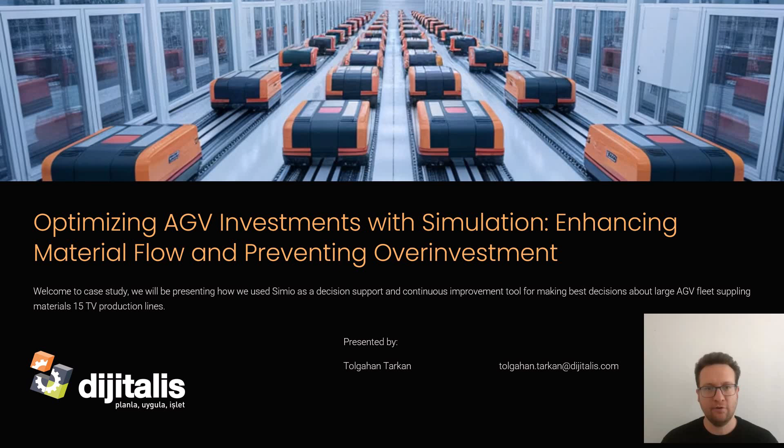In this session, I will start with an introduction to our company, Dijitalis, and myself. Next, I will be presenting the details about our project, such as the initial design, improvements, experiments, the results analysis, and so on.

Dijitalis Consulting was established in 2006 in Istanbul by Tolga Yanaşık. Since then, we have successfully delivered over 250 projects for more than 400 clients across 15 countries. Our clients represent a wide range of industries, with the majority coming from the automotive, manufacturing, logistics, and textile sectors.

Most of our clients approach us when they are redesigning their facilities or undertaking major investment and improvement projects. For these facility layout projects, we build mathematical models to analyze material flow and identify inefficiencies. We then test various layout improvements and design alternatives.

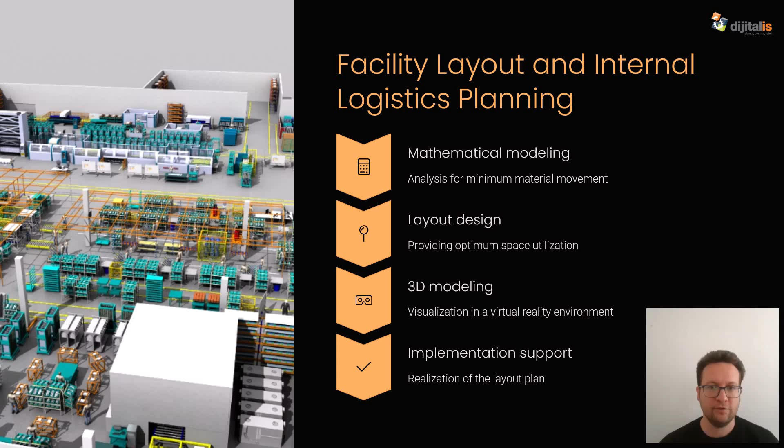Our proposed facility layouts are not only delivered through AutoCAD drawings and Excel-based calculations, but they are supported by discrete event simulation models that offer realistic performance insights along with 3D and virtual reality visualizations. Additionally, we provide ongoing support during the implementation phase to ensure a smooth transition to the new facility design.

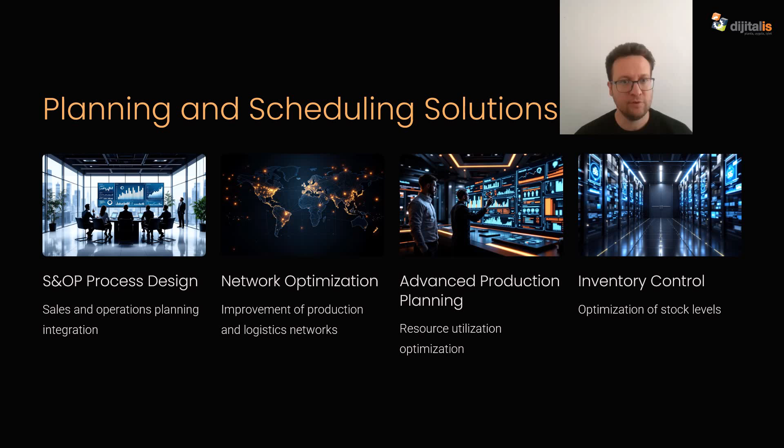Our services go beyond facility design and internal logistics. We also analyze and optimize large-scale, complex supply chain systems, integrating them with sales and operations planning processes. We deliver advanced production scheduling and planning solutions to enhance production capacity and improve customer service levels. In addition, we optimize inventory control strategies using simulation models, helping our clients avoid stockouts while minimizing their inventory levels.

So, about me, as I said, I'm Tolgahan Tarkan, a senior consultant in Dijitalis. I'm a simulation expert, a business analyst, and data analyst. I have completed my bachelor's degree in Yeditepe University in Turkey and my master's degree in Jönköping University in Sweden. I have more than 12 years of experience in simulation modeling in a wide range of industries, including production systems, supply chains, energy systems, restaurant operations, and much more.

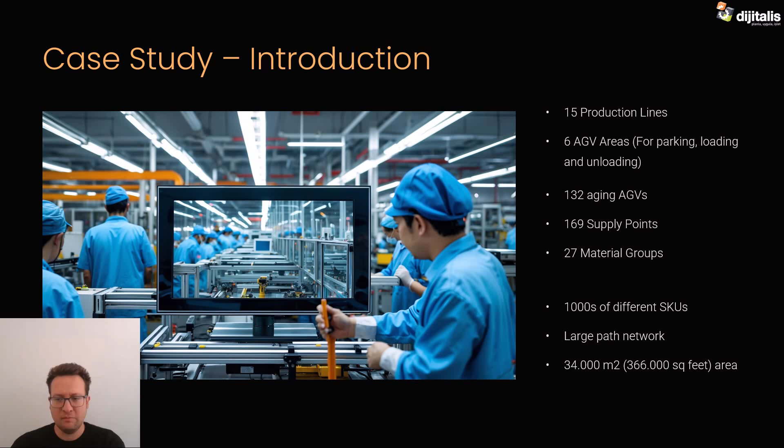So, about our case study. Our case study is about a TV manufacturing company which currently has 15 assembly lines and an aging AGV fleet of 132 vehicles, supplying from 6 AGV parking locations to 169 points on assembly lines. There are thousands of different SKUs and 27 material groups transported to the assembly lines. The production facility is quite large. We are talking about an area of 34,000 square meters, covering the assembly lines and the AGVs.

The TV manufacturing company is initiating big investment projects. They are renewing their production facility with huge investments on automated warehouses, a new paint shop, increased production capacity on assembly lines, and of course, a new AGV fleet. Even though it is not a real greenfield project, they call it greenfield due to the size of the investment. Our main focus is, of course, on the AGV fleet.

The current AGV fleet is outdated. They often get stuck in the path network and cannot supply material on time, causing delays in the production schedule. Our client wants to know how many AGVs they need to order without overspending and without causing deadlock or stockouts.

As you know, AGV companies aim to sell as many AGVs as possible, and their clients never know if these numbers are correct. Small AGV manufacturers also don't do detailed analysis on the required number of AGVs, since they need to develop complex models to prove the numbers to their clients, and they don't have resources to do so.

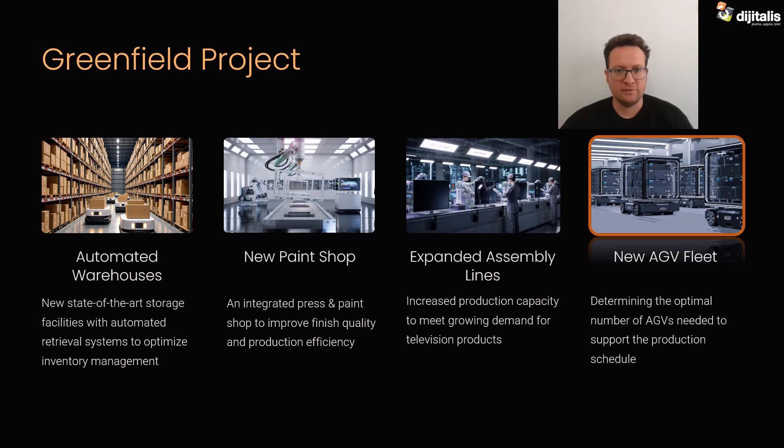On the other hand, manufacturing companies usually decide on their investment based on their experience, such as: previously we were using this many AGVs, so in the new facility we shall order around the same number. Their decisions are mostly based on rough estimates. Deciding on the optimal number of AGVs is not an easy task, as it depends on many criteria, such as AGV specs, production schedule, supply process, bill of materials, path network, etc.

The question our customer had was not a single question of how many AGVs I need. They had many more questions related to the AGV supply network, such as: is the production schedule feasible? Will there be any stockouts? When should I have the changeovers? How should the supply process be? When do I need to start supply of the new order? How many AGV loading stations do I need? Will there be any deadlock on the path network? Which areas will be highly congested and which areas will have the highest traffic flow?

So before starting simulation modeling, we took these following steps. First, we have collected data about the facility layout and product data, such as the bill of materials, the warehouse locations, routings of materials, AGV parking stations, and then we analyze all this data and verify it with our customers.

Next, we had to establish a feasible and efficient process for supplying the materials to assembly lines. Should it be a push system? Should it be a pull system? Maybe a milk run or a mix of these processes. Also, there are so many parameters that we need to decide, such as reorder point, reorder quantities for all these materials. How frequently we need to supply these materials. So this is a key input for our simulation model that will determine the outcome, and the process should also be easy to implement on the shop floor.

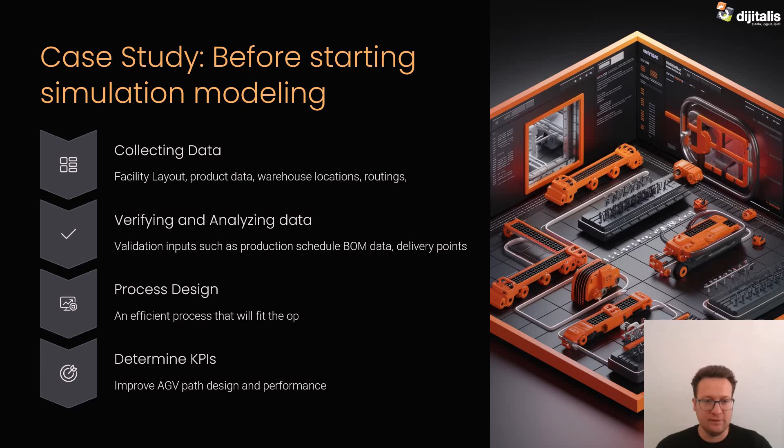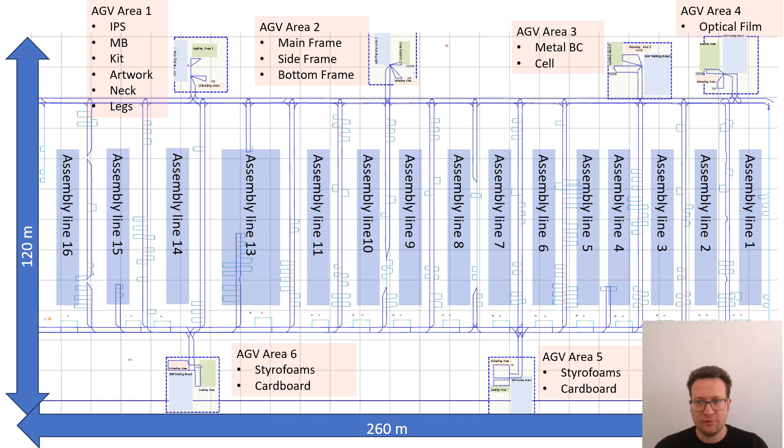Here you see the layout of our facility. As you see, there are 15 assembly lines. Note that assembly line 12 and 13 were joined together, so now it's called assembly line 13. Also, there are 6 AGV areas, and here you see which materials are supplied from which AGV areas.

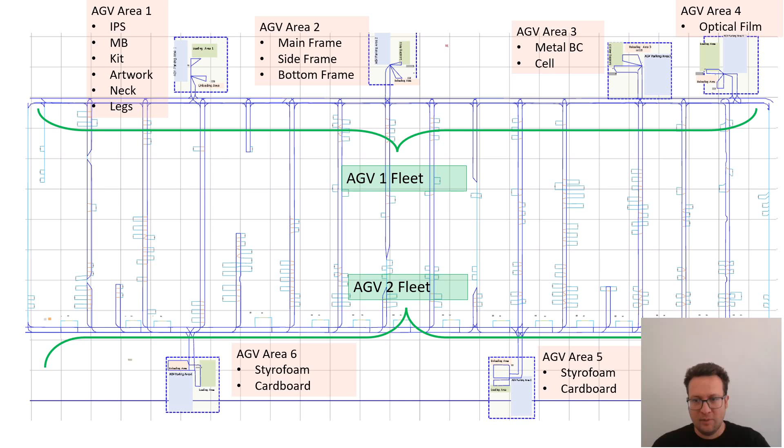There are 2 AGV fleets in the facility. AGV2 fleet supplies all the styrofoams and cardboards which are used at the end of the assembly line. AGV1 fleet supplies all other materials which are usually supplied on the rest of the assembly line. The parking locations of AGV1 fleet is on the upper side, whereas AGV2 fleet parks on the bottom side of the layout. We have determined our KPIs in line with our goal.

The primary KPI is, of course, the production delay. The target value of this KPI, as you may guess, is 0. We should not have any delays occurring due to late delivery of materials. The second output we will look at is the path congestions. We will use heat maps to demonstrate where the AGVs are waiting longest in the path network and which areas have the highest traffic flow.

Other KPIs that we are going to use are AGV utilizations and the time to pick up a full pallet. We will not only look at the average utilizations, we will inspect how the utilizations change throughout the simulation run.

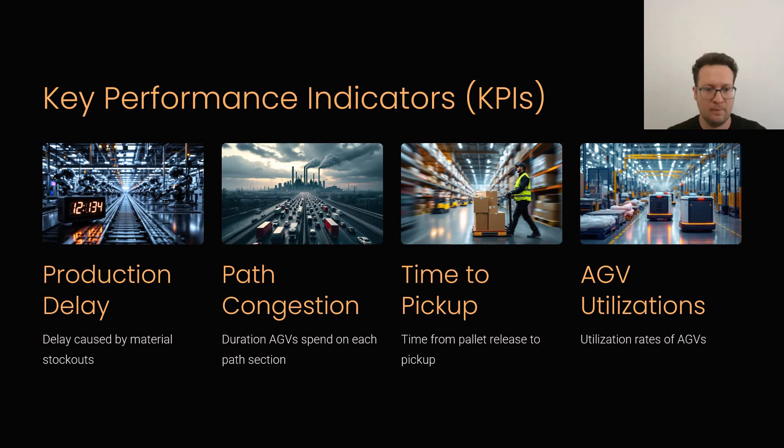For the supply process, what should it be? Shall we use a push system or a pull system? So how does a push system work? As most of you know, in the push system, the materials are delivered to their destination as soon as the resources are available. Whereas in the pull system, there is a material replenishment algorithm which is triggered when the level of stock goes below a certain reorder point and order quantity is calculated based on some parameters. Pull system is usually associated with low inventory, whereas the push system is usually associated with high levels of stock.

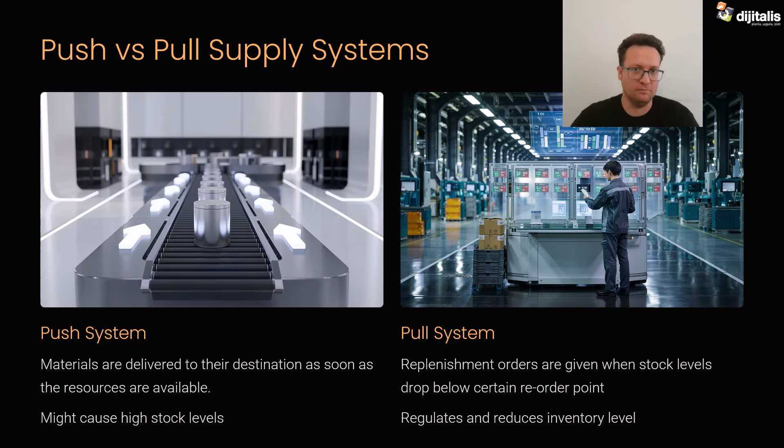But we still decided to implement push system. Why? First of all, pull system is not easy to implement. There are thousands of different SKUs, all having different number of items in a pallet, which highly affects the reorder point and quantity. It is not practical to calculate optimal reorder point and reorder quantity for every single component. Even if we calculate all these parameters for thousands of SKUs, pull system is still very difficult to manage on the shop floor with so many different variables for every single SKU.

A push system, on the other hand, is much easier to implement and manage. It doesn't require complex calculations for order quantities. Instead of this, we just use a time-based trigger to start the supply process for the next product before the changeover. So the only parameter we need to have is how many minutes before the order is completed should we start supplying the materials of the new order.

We can also regulate the flow of push system with additional constraints, such as checking the availability of storage area next to the assembly line before releasing the transportation order. Finally, the assembly lines also have large storage area next to them, which makes it possible to implement push system.

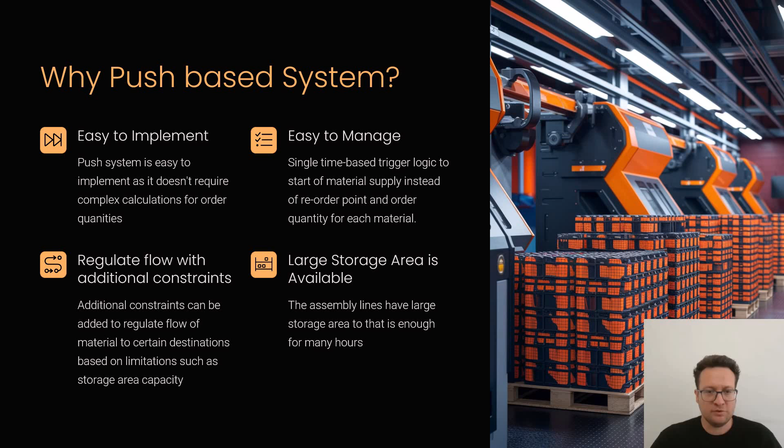Here you can see the process that we have designed to release transportation orders for the next product. We use several data sources for this process. First, production plan, which changes daily. Second, pallet data, which is more static. And then bill of materials, routings, takt times for each product on the assembly line.

By using the remaining quantity of the current order and the production takt time, we calculate how many minutes are remaining until the changeover. This allows us to trigger material supply for the new product X minutes before the changeover. In this push system, we only need to calculate one variable. How many minutes before changeover should we start supplying materials for the new order?

Once this trigger is activated, AGVs pick up the materials required for the new product based on routing data. These materials are delivered to their appropriate destination. And after the delivery, the AGVs check if there is an empty pallet next to the assembly line. If there is an empty pallet, it will also pick it up and drop it off at the unloading station in the AGV area.

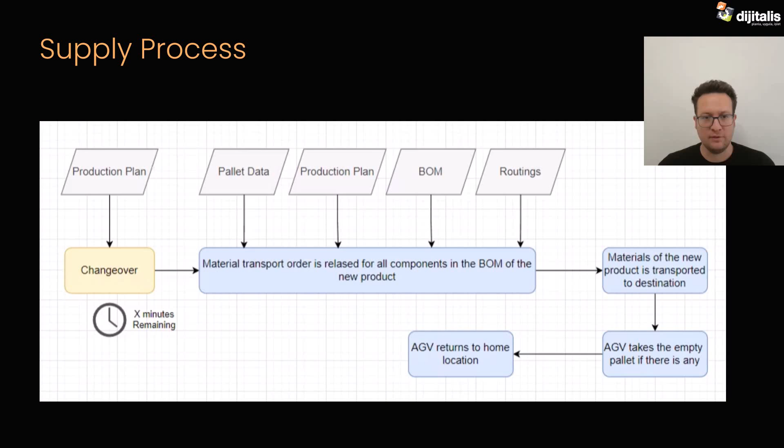After defining our KPIs, designing our supply process, validating the input data with customer, we are now ready to begin the simulation modeling phase. For model creation, we first built a data-oriented baseline model for the AGV supply network. We have integrated the push system that we have designed, the facility layout, and data provided by the customer into the simulation model.

Once the model is developed, we verified it together with the customer to ensure it behaves as expected. This includes checking the model logic, inputs, and results for consistency and accuracy. We then analyze the simulation results to identify inefficiencies, bottlenecks, deadlocks, or stockouts. Based on these findings, we provided several improvement suggestions for the identified problems.

After incorporating the improvements into the baseline model, we run a series of experiments to determine the optimal number of AGVs. The goal is to minimize the investment costs while maintaining the feasibility of the production plan. Note that for the production plan input, instead of using historical data, we requested a hypothetical high demand schedule that the customer aims to support with their new AGV fleet.

Even though the model was very large, it wasn't difficult to model with Simio, and it was also very easy to use for our customer. Thanks to the object-oriented structure of Simio, we were able to define custom library objects and make changes on these object definitions when necessary, instead of editing every single instance of the object in the model.

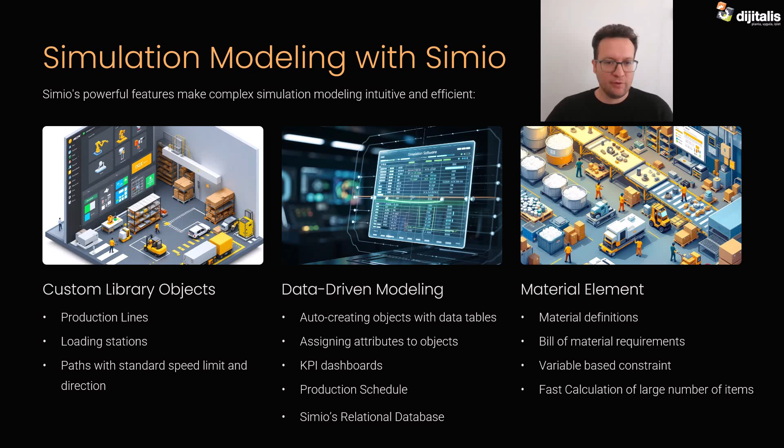Instead, for our modeling purposes, the two most critical aspects of an assembly line were modeled, and these are the cycle time for the product being assembled and the changeovers that occur on the line. So by focusing on these two elements, we were able to simplify the model while maintaining accuracy for the material flow and timing of supply.

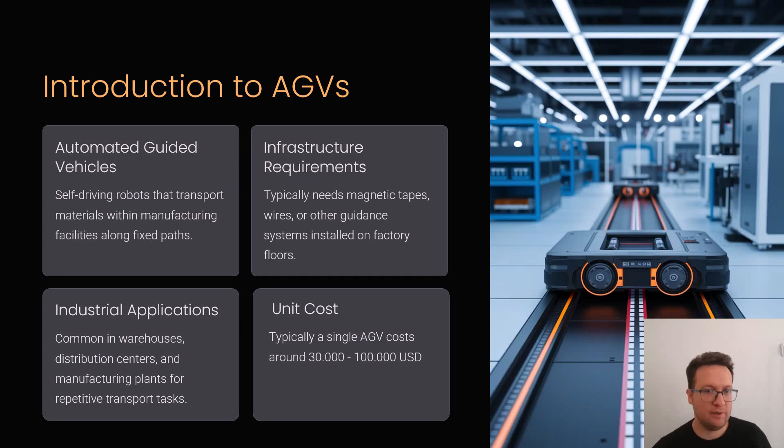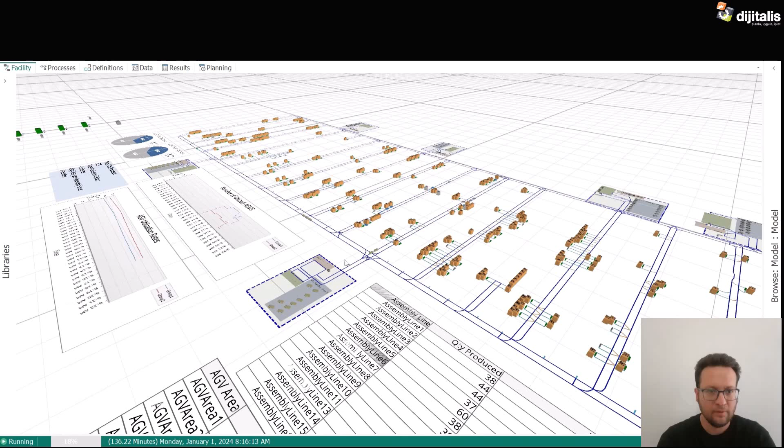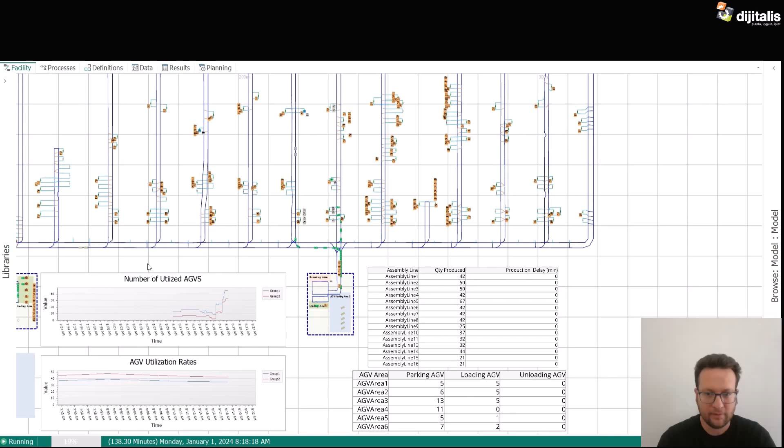So here you can see how the simulation model of the AGV system works. As you see, AGVs are leaving their locations with fully loaded pallets, and the assembly lines are producing the TVs. Currently, there are no delays. Here is an AGV working position. You can also see how many AGVs are being parked, loading, and unloading at any moment. We can see how many AGVs of each AGV group is being utilized at the moment.

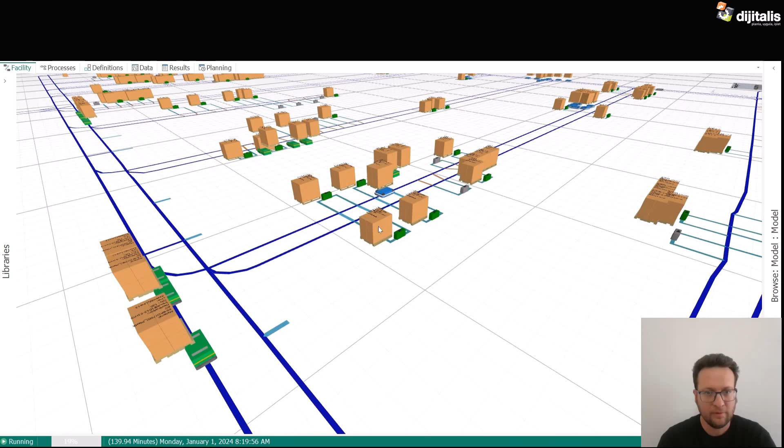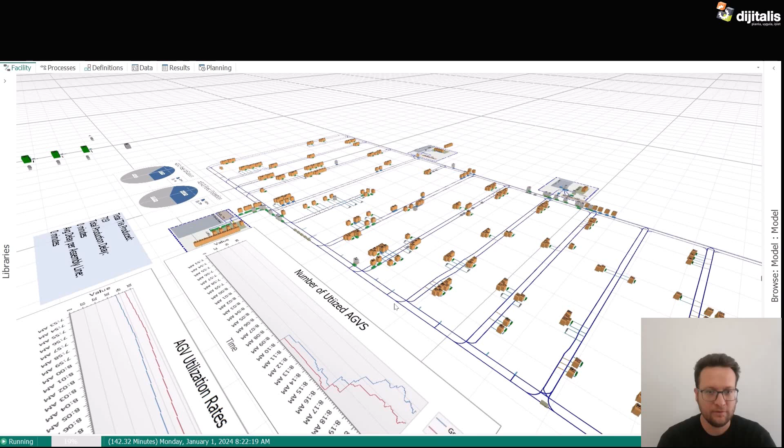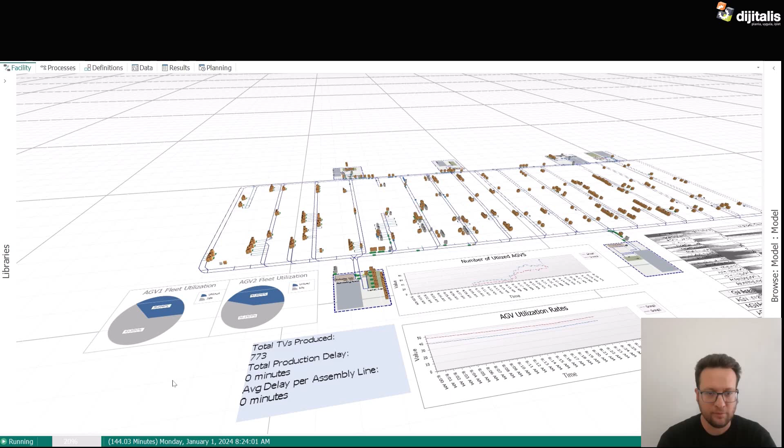We can also zoom into the pallets and see their quantity, what is the material, in which location. So we can verify if it's in the right location and the quantity is correct. As you see, AGV utilization is changing every moment, and the total TVs produced is also increasing. You see, at that moment, the AGV utilization had a sudden peak.

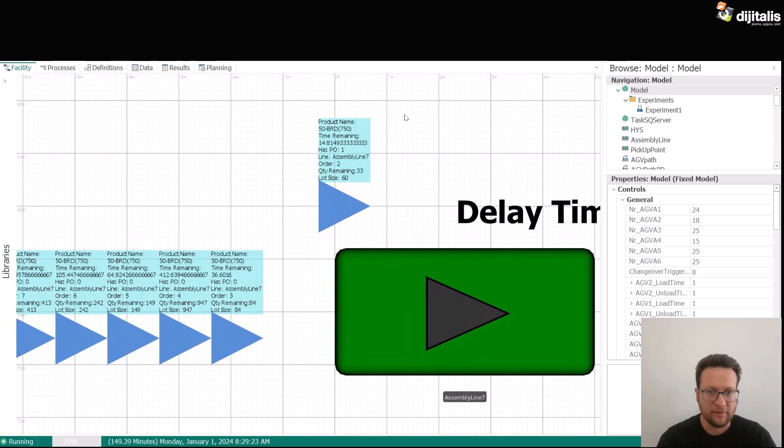Here we can zoom into our assembly lines. So assembly line is just one process, and it has just a cycle time and changeovers. So we also have the parameter of changeover trigger. So how many minutes before the changeover I have to trigger the release of the new order. So here you can see this is set to 8 minutes. And once the time remaining reaches 8 minutes, we dispatch the new order.

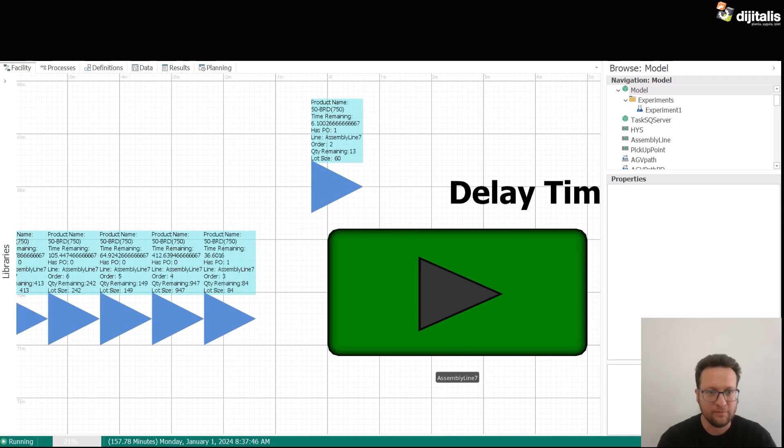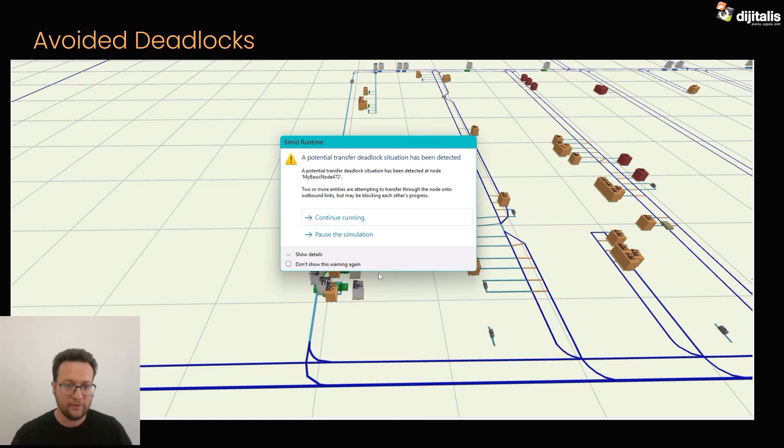But let's see what happens if you use a single lane that is bidirectional. So you see the AGVs have to queue up in order to not get stuck to each other. But even though they wait here for the other AGVs coming from the other direction, once they go inside the stop location next to the assembly lines, you will see that they will get stuck there because there is a huge traffic in a very small area there. As you see, the AGVs moving in opposite directions are stuck here. And this is very hard to avoid with such huge traffic in such small area.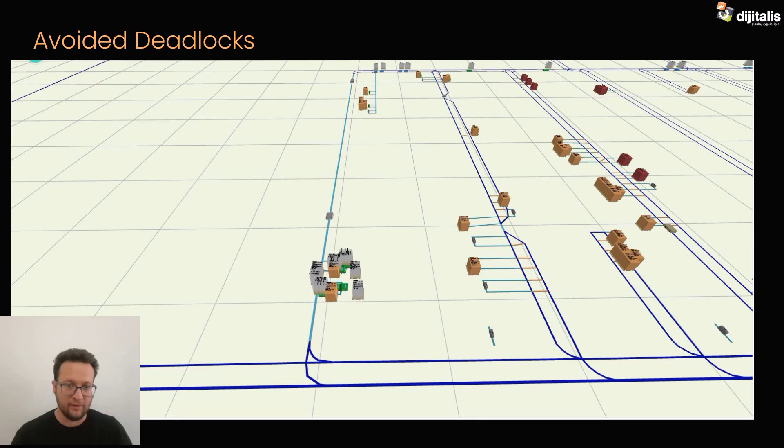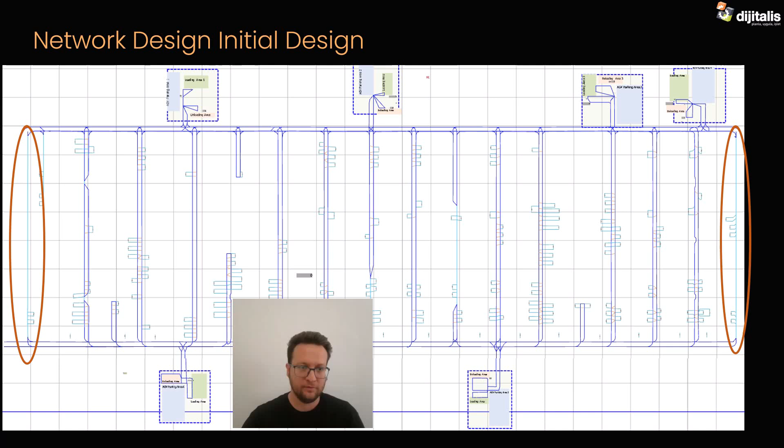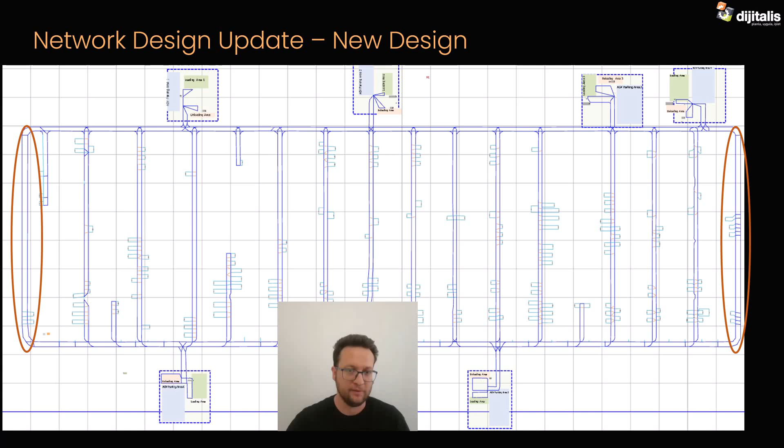So this was the initial design that they proposed, but we have changed this to a new design, which you can see here. So as I suggested to them, this should be single directional, but two paths in opposite direction. So the AGVs will not get stuck to each other in such a path. As long as they have their own track in one direction, just like a train, they will never have to wait for each other. Only in the junction points we may have some waiting times, and we will see that in a minute. So this design works much better, and we don't have any deadlock in this design.

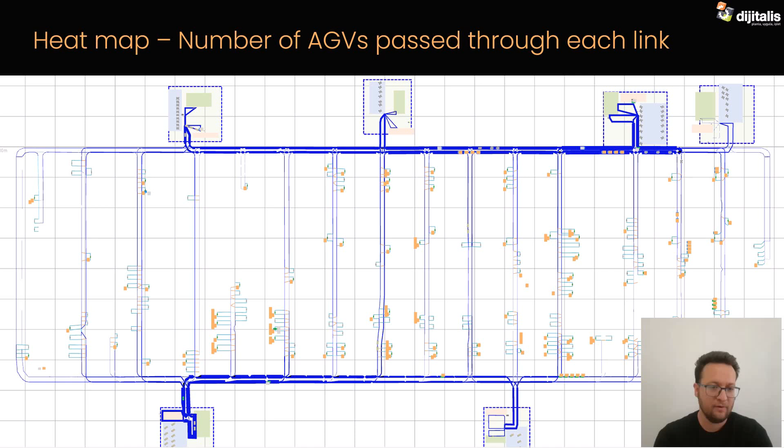So here we see the heat map. After running the simulation, we see how many AGVs passed in each link. Here you can see some paths have a lot of traffic, a lot of AGVs passing through these parts. But this doesn't mean that they are waiting or spending most time there. You can think this place is like a highway where a lot of movement is happening, but it doesn't necessarily mean that they're spending the most time or waiting longest there. So let's see where they waited the longest.

So we have another heat map for this. So here you see actually they go almost the same speed in all paths. But of course, some paths are a little bit thicker. So the thicker it is, the more time they spend in this part. So you see at the junctions, they spend a little more time, especially in the big junctions.

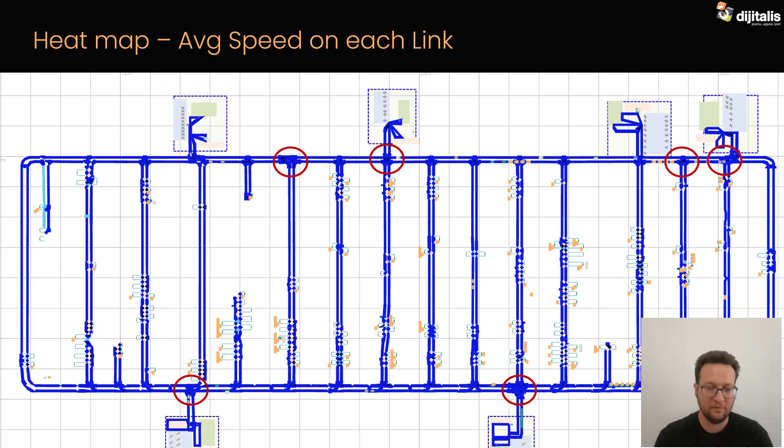There is a lot of traffic, so they might need to wait for each other. So it might be a good idea to separate some of the AGV parking stations to two. So that will distribute the traffic into different junctions.

After doing these improvements, we have done a series of experiments using the experiments module in Simio. So our purpose is to optimize the AGV fleet. But not only that, we also need to know how many loading stations do we need. And another parameter that we consider is the order release trigger.

As you remember, based on our process, we have only one parameter, not many reorder points, reorder quantities for each different material. We just have a single parameter that is deciding when the materials for the new order will be released based on the changeover time. So how many times remaining to new changeover, I will start feeding the new material.

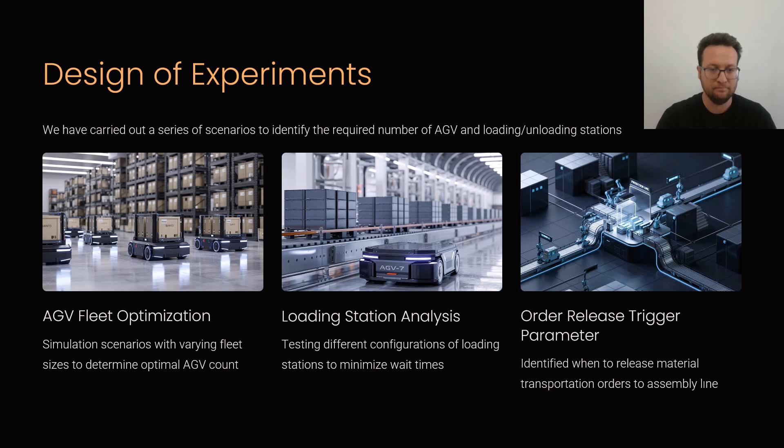So these are our inputs: the number of AGVs in each location, the loading stations in each location, and the order release time. How many minutes before the changeover I will do the order release. So when we run the simulation with the initial inputs that they have suggested, we see small delays in every few assembly lines. As we see, assembly line 1, 3, 9, and 10 have some delays.

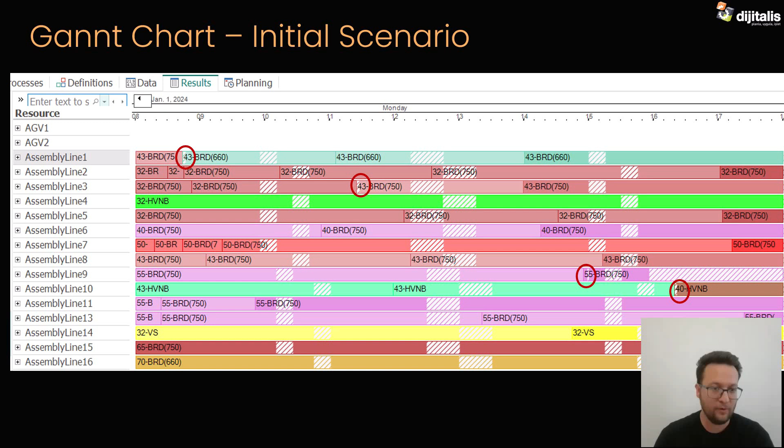So the Gantt chart in Simio is very useful to see what has happened throughout the simulation run. As you see, there are many changeovers in the early morning, so they give us an intense schedule, and some of the changeovers are even happening at the same time. So there are a lot of workload on the AGVs in the morning.

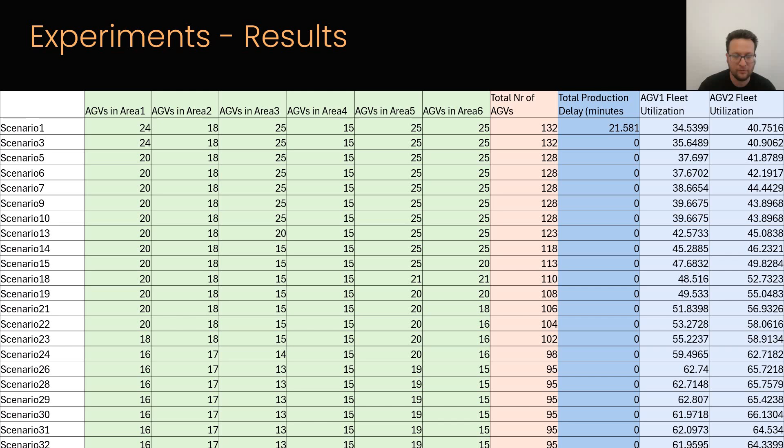So we can see all the results for a filtered set of scenarios here. So one of our key inputs is the order release time, and the other inputs you can see in green color is the AGV loading stands. So we change these numbers to identify how many AGV stands we need. And also we change the order release time to see how our KPIs change. So you can see how this KPI changes along the scenarios in these slides.

So in order for us to determine the best scenario, actually we want, of course, zero production delay, and we want to have at least four AGVs waiting in the parking areas in each AGV area. So we need a safety stock of AGVs. So some AGVs could be charging or in maintenance, they could break down, or for any reason, for peak demand, we should be keeping four AGVs at least so that we can meet these peaks in demand.

So we have decided that scenario 26 was around the less numbers. So that means we need just 95 AGVs compared to 132 AGVs in the beginning, which they had suggested to buy. So here we can actually profit from ordering much less AGVs, more than 30 AGVs. So that's a lot of savings.

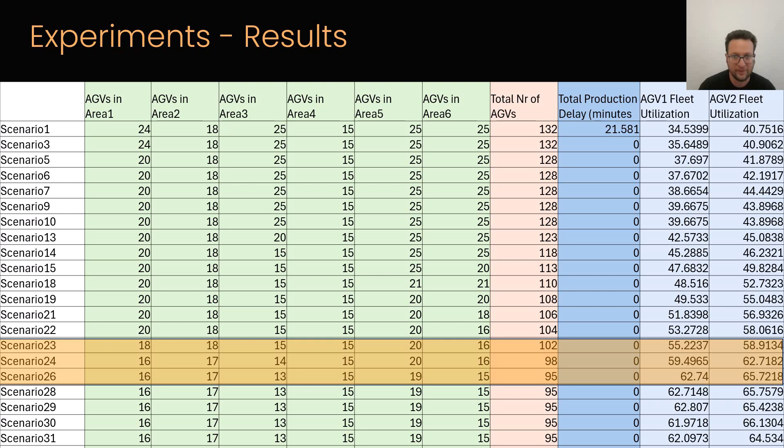As we have determined that scenario 26 has the optimal outputs of zero production delay and enough utilization for the AGV fleet and enough AGV stock, we can see what are the inputs of this scenario. So the order release time of 16 minutes was enough to supply all the materials to all the assembly lines on time. And we have also identified here how many AGV loading stands we need in each AGV station, so simultaneous loadings can happen. The AGVs can start fetching the new parts quickly without any delay.

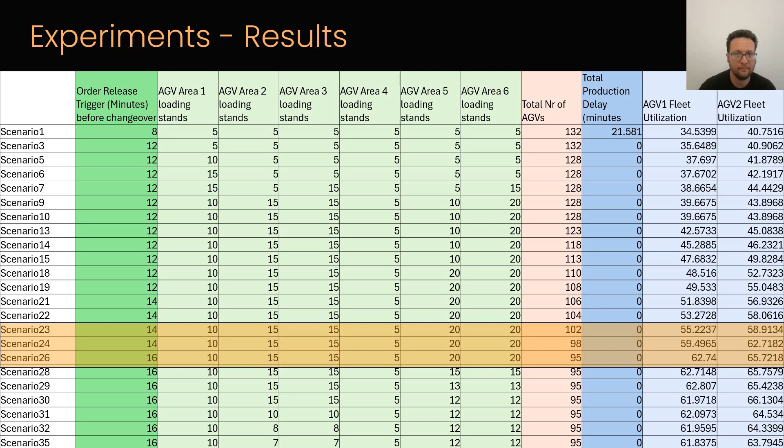As we have determined that scenario 26 has the optimal outputs of zero production delay and enough utilization for the AGV fleet and enough AGV stock, we can see what are the inputs of this scenario. So the order release time of 16 minutes was enough to supply all the materials to all the assembly lines on time. And we have also identified here how many AGV loading stands we need in each AGV station, so simultaneous loadings can happen. The AGVs can start fetching the new parts quickly without any delay.

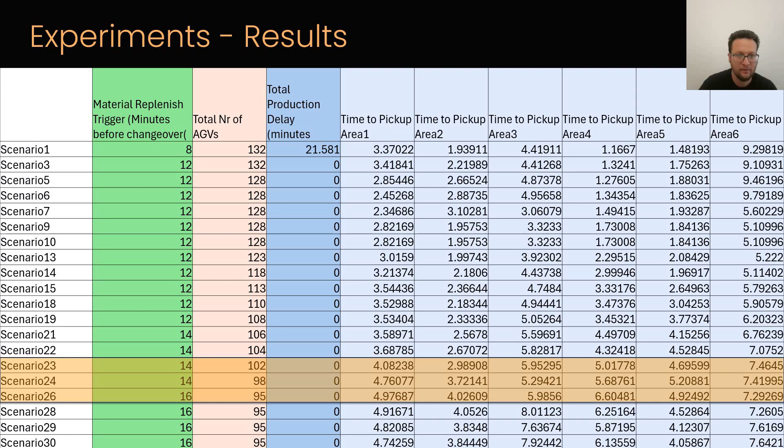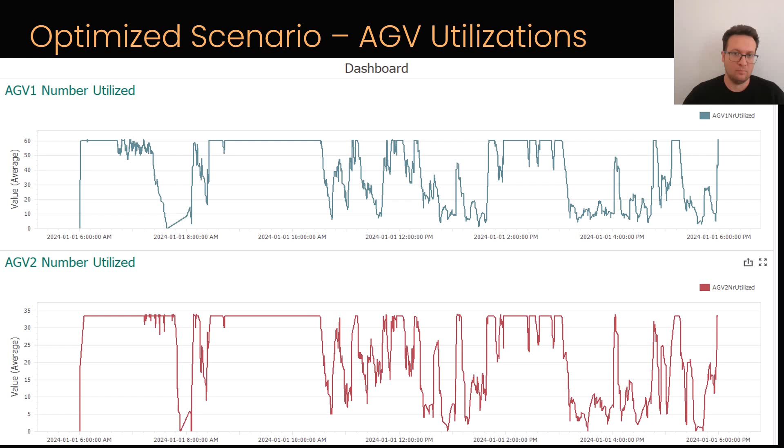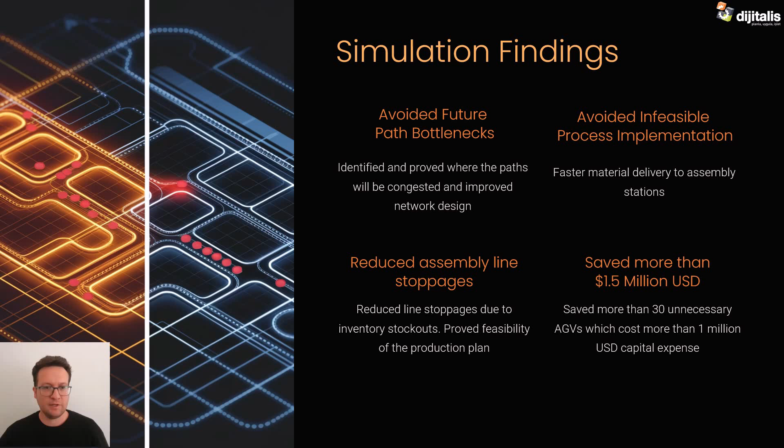With the use of Simio simulation model in this project, we have provided great benefits to our client. Firstly, we have saved more than $1.5 million just in excessive capital spending for AGV purchases. Considering an average AGV at the price of $50,000, when we order 95 AGVs instead of 132, we save more than $1.5 million in CapEx. Besides this, we have also avoided future bottlenecks and process inefficiencies, assembly line stoppages, which could cause also millions in OpEx. Most importantly, we have proved feasibility of the production schedule with the given set of inputs such as AGV specs, path network, and supply process.

With this case study, we have provided more than just finding optimal number of AGVs to our client. The simulation tool we have developed is being used as a continuous improvement tool for testing various scenarios, including changes on path network and facility design. They are also able to see the results with different bill of material data for their evolving product portfolio. They can also test and see the results of different supply processes for a set of components. They are continuously validating the production schedule feasibility, and making changes to it when necessary.

In summary, with this single simulation project, we provided all of the following tools to our client: a CapEx and OpEx cost optimization tool, a path network deadlock prevention tool, a supply management tool, a decision support for new investments, a continuous improvement tool for testing layout and process improvements, and a parameter-based resource optimization tool. So you can see the value we have created just on one project in Simio. I know there are very costly software for creating just the heat maps on the path network. In this case study, heat map was just one of our outputs for the results.